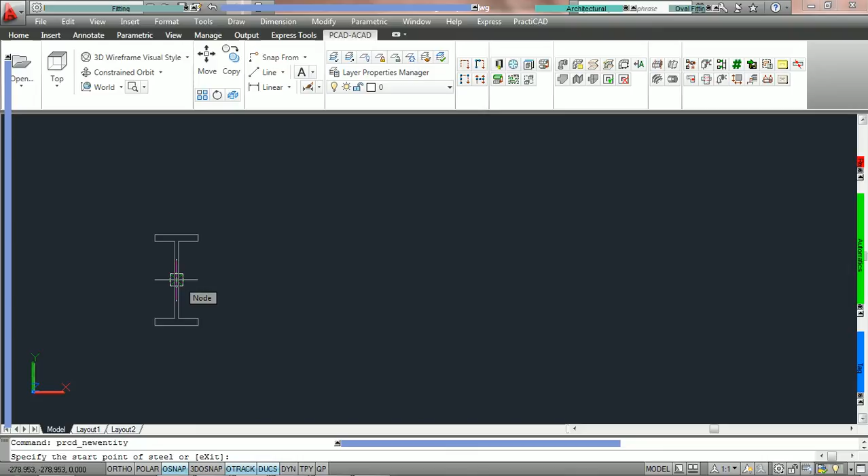Then we're going to click between both columns. Notice currently that we have a node highlighted. We click on the center node of one column, then on the center node of the other column, and hit 0, enter for the rotation.

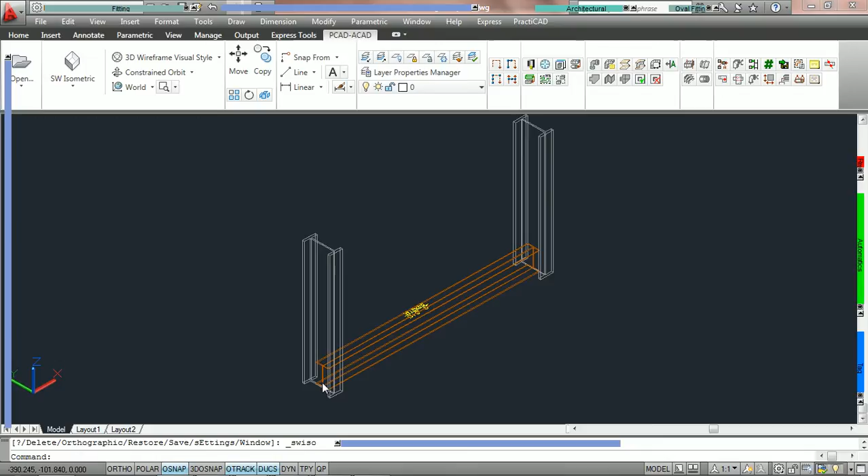Now notice that currently the elevation is at 0. It did not go to the top of the columns, which is where we wanted it. The reason is because columns have nodes at both the top and the bottom. AutoCAD is going to snap the entity you're holding to whichever node is closer to your current elevation. Our current elevation was actually at 0, so AutoCAD snapped the bottom center of the beam to the node closest to 0. So if we wanted to make sure the beam snapped to the node on top, one thing we can do is set our current elevation higher than the top of the column.

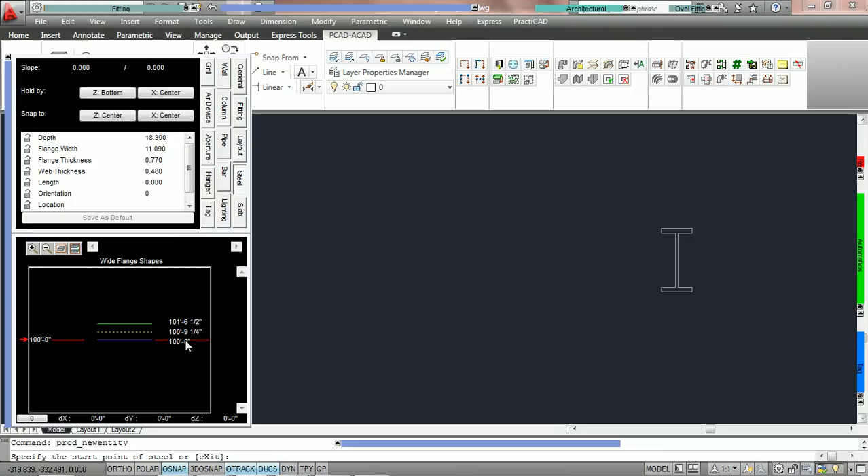For example, we come and grab that beam again, hit place, and this time take the red line, or current elevation, and set it to 100 feet in the air. We hit enter. Now 100 foot is way above the top of our column, but once we go to snap to this node, the nearest node available would be the node at the top of the column. It's just a little trick. We can click here, then come over and click this as well, hit 0, enter for rotation, and now we have the beam perfectly placed at the right elevation.

Another method for making sure we get the right elevation is to utilize the replace Z option. There are separate tutorials on how to use replace Z, but here we're going to show you how to utilize an existing automatic and give it the proper elevation and make sure everything's correct.

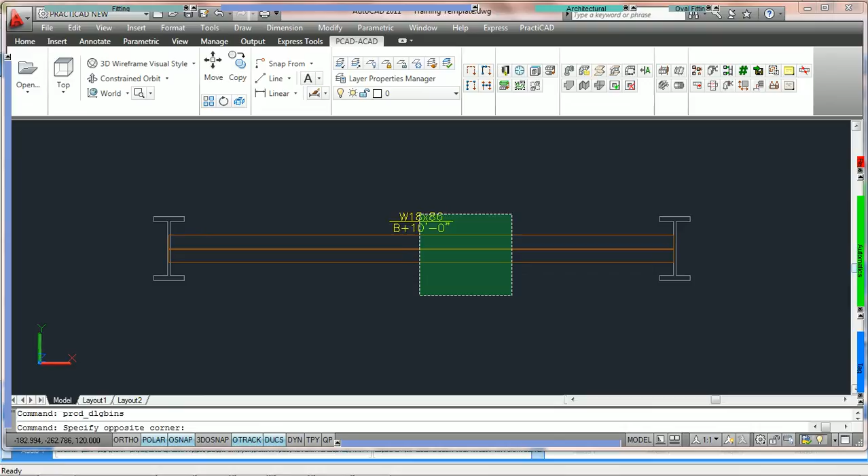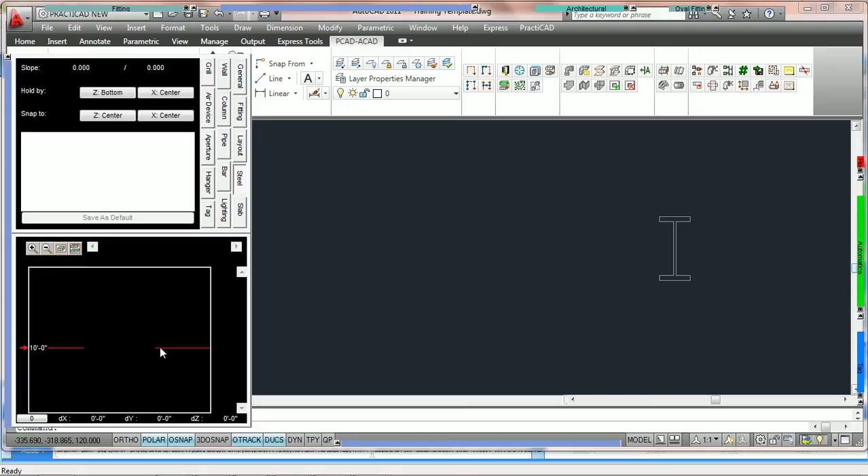We're going to delete what we've drawn here, go over to our automatic bin, and check the Z on button. That's the AutoCAD or PractiCAD command automatic that turns replace Z on. When replace Z is active, regardless of what elevation a node is at that you snap to, PractiCAD is going to place down that entity you're holding at whatever your current elevation is, meaning whatever you put in the elevation box. So we're going to grab a wide flange shape, hit place, and put in exactly what elevation we want this beam to be, which is 10 foot.

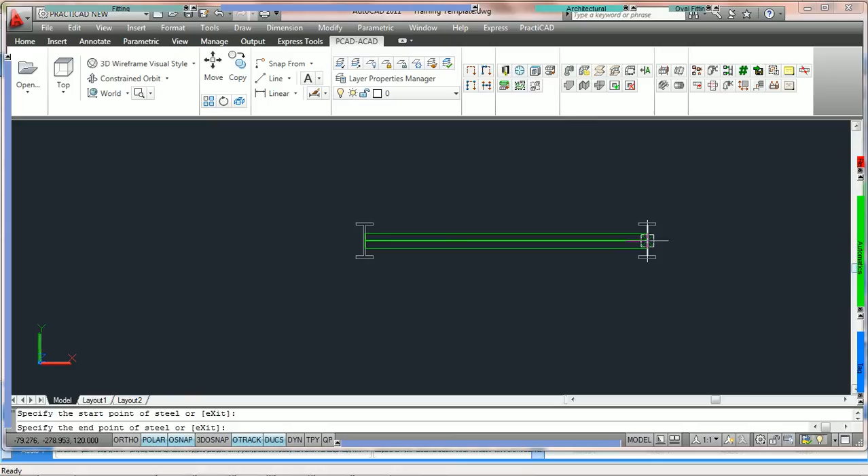No matter what, wherever I place this on the drawing, no matter what node I snap to, regardless of where that node may be on the Z axis, when Replace Z is on, PractiCAD is going to follow the current elevation, or whatever's in your red line elevation box. You can see it's at 10 foot currently, so all we need to do is click here, click here, hit 0, enter.

You can see that because Replace Z is on, we have the beam at the right height. One key thing to mention: if you use this, once you're done using Replace Z, make sure you shut it off.

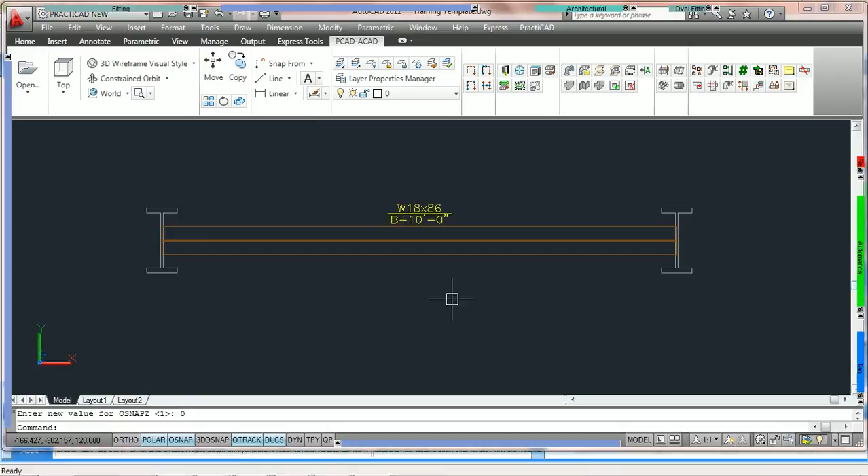The last option is to control our endpoint snaps to make sure PractiCAD puts the entity at the proper elevation. PractiCAD offers an endpoint snap which rides at the top, center, and bottom of the column. We're going to go into isometric view, grab a beam, and attempt to place it, isolating the endpoint.

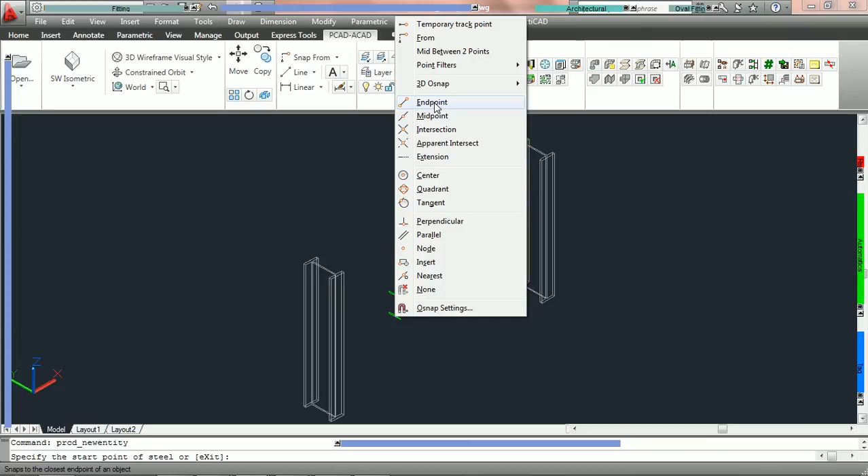I'm going to hold down the shift key and right click, and go isolate the endpoint for this. We'll show you that currently PractiCAD is only highlighting one point, and that endpoint snap happens to be at the center of the column.

The reason for that is inside the item box, underneath the column tab, there's a place that says 'snap to', just like we do in steel. You'll notice that currently it says snap to Z center. The snap to setting has to do with the endpoint node.

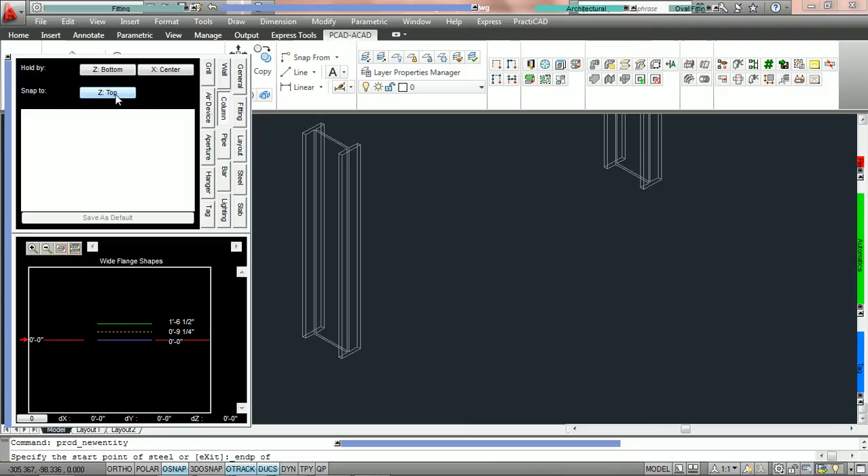If we switch the snap to here to the bottom or to the top, then if we go to attach a beam and isolate the endpoint, only that node will be available. So if we come over, you see the node now available for the endpoint is at the top of the column, no longer in the middle. We can use that to put it at the right elevation.

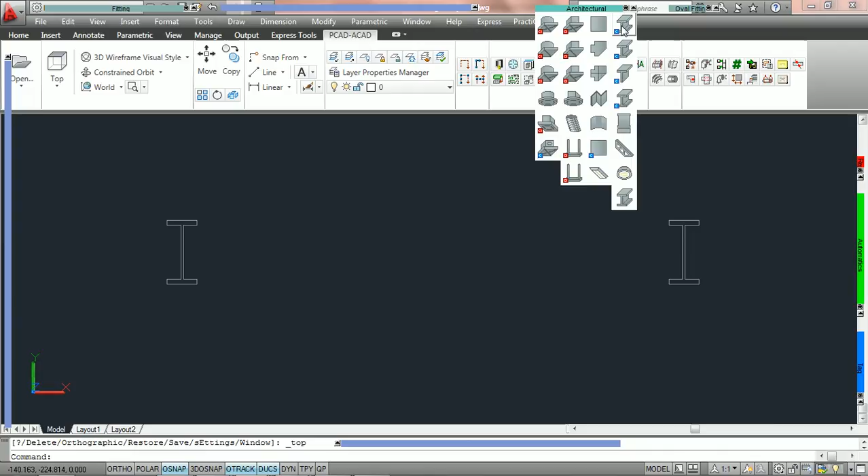To demonstrate this, we're going to go back into the top view, grab a beam from our bin, and hit place. We've already set the snap in the column tab to snap to top. You can see here we've got the current elevation at 0.

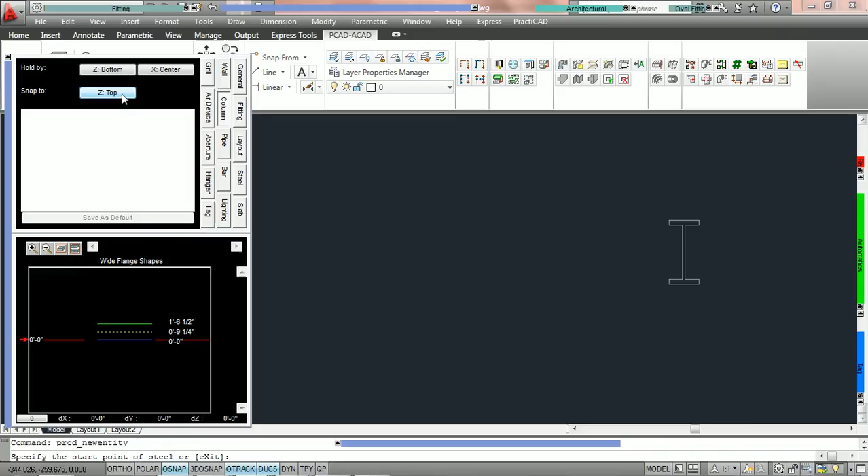Even though the current elevation is at 0, because the only endpoint node available on this object will be the top one, it's going to snap it to the proper place anyway. So we're going to hold shift and right click to isolate the endpoint, and it's important to make sure we isolate the endpoint.

We can get verification by holding our mouse here, and you can see AutoCAD showing us that we're holding the endpoint. We click once, then we need to shift right click again and isolate the endpoint for this connection. We hold it here, and once we see endpoint, we click.

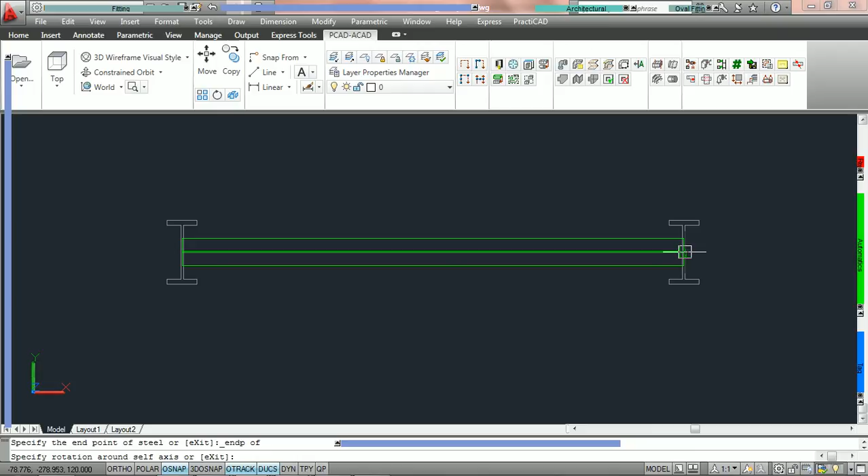After we rotate it, you'll notice that once again we are at about 10 foot where we want it. That concludes the three different methods to making sure we get the right elevation points when connecting between two columns, or any two entities, in AutoCAD.